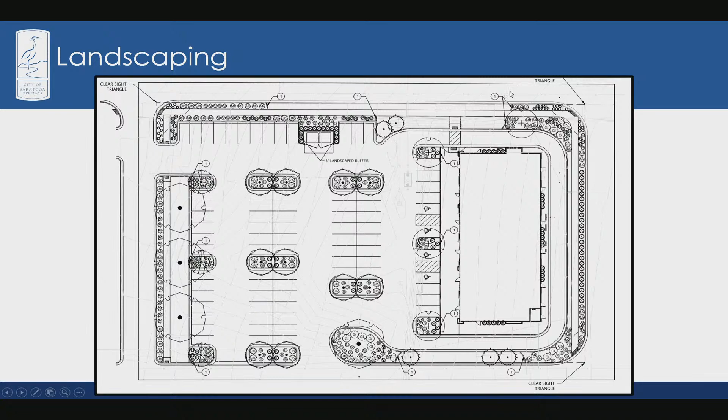Okay, so you know where the drive-through is? So that clear sight triangle that's past the corners of the drive-through, you're saying that there is cross-traffic there? Right. So there is traffic on the roads on the edges of this site.

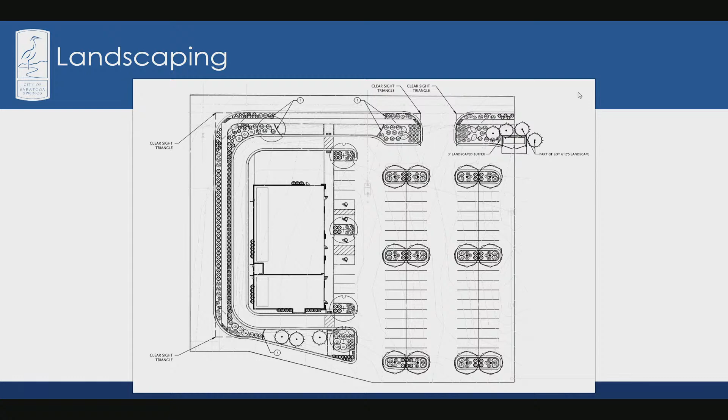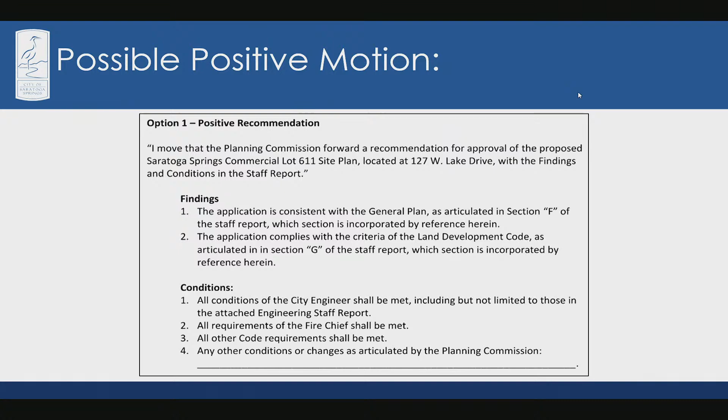Any question on the motion? All in favor, say aye. Aye. Any opposed, say nay. Great, that passes. All right, item number 3, Saratoga Springs Commercial Lot 610, site plan located at 1321 North Redwood Road.

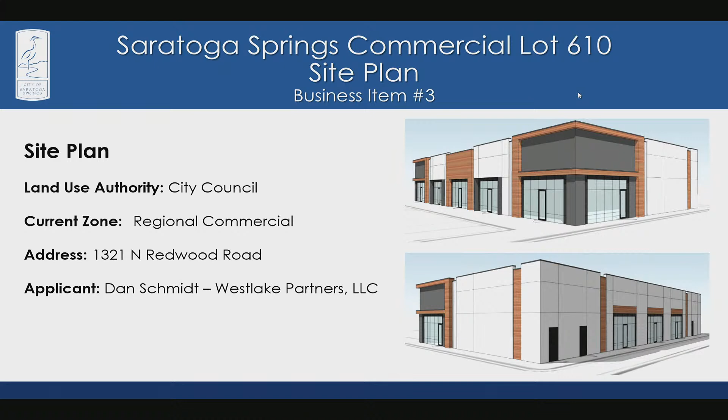Dan Schmidt, Westlake Partners LLC as applicant. This is same thing, different site, essentially. The buildings actually are different. So the address is along Redwood Road.

The access will be off of Lake Drive. It is 1.3 acres and meets all the parking requirements. Again, there is a drive-through option on this, and you can see the stacking on this one. So it does provide adequate parking and stackable sites, and it meets all of the landscaping requirements.

They have put a lot of effort into connectivity for pedestrians, with a connection to the Wendy's site to the north. There was an existing one, so they have made that connection.

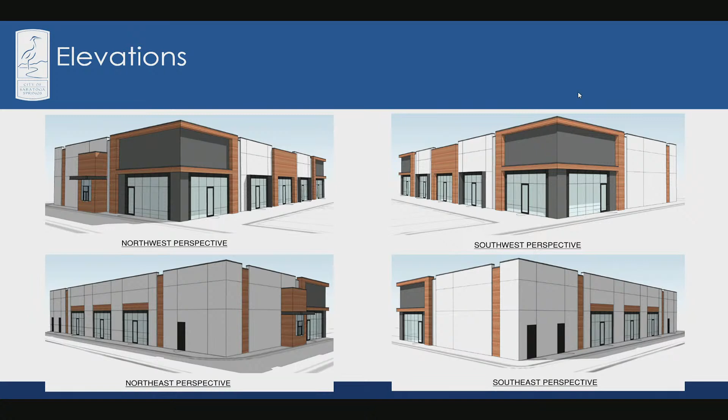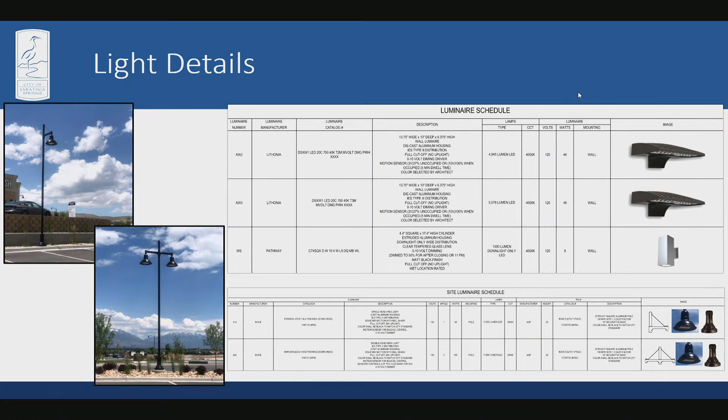And then the elevations, they have changed it up a little bit, like Commissioner Cunningham had stated. There are different aspects of this in the architectural designs. Lighting is exactly the same as the previous two sites. There is the shut-off connections, as Sam had mentioned before. And with that, staff recommends approval.

Okay, would the applicant like to add anything to the presentation? No. Okay. All right, I'll turn this over to the commission for questions and comments.

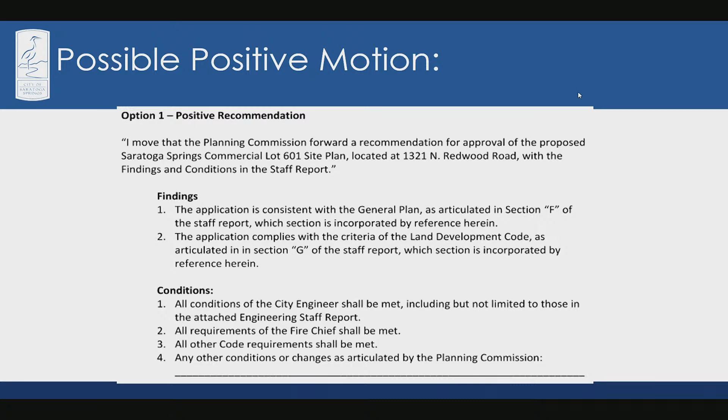Commissioner Wilden: Could you explain the flow of traffic? I know it's on Redwood Road, but I was struggling to figure out how people will access it. If you look at Plat F, you can see Lake Drive starts at Exchange, comes down and curves in front of this site, and then will go out to Redwood Road at a traffic light eventually.

There is also Shoreline Drive, and again, the access off of Redwood Road. Thank you very much. That's it.

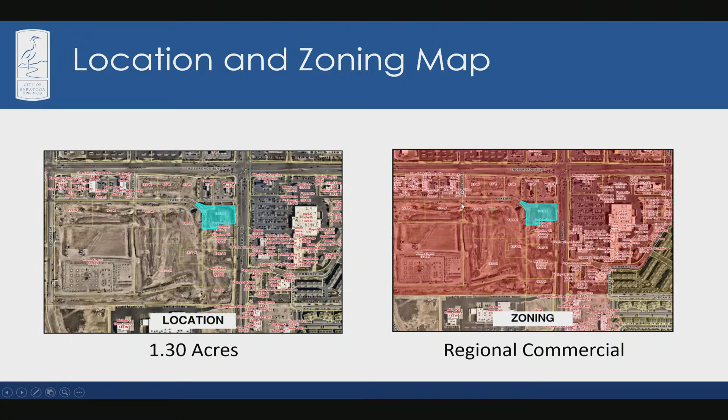Thank you, Commissioner Wilden. Commissioner Kilgore: Same question. Does the applicant agree to comply with the conditions in the staff packet? Yes. All right, thank you.

And then I did have one - I just want to know, just curious, what tenants you're possibly expecting, if you know already. Yeah, this one's a mix, I think it's mostly food. I don't actually recall all the tenants on this building. We do have the drive-through spoken for already. That seems to be the first ones going these days. And there may actually be one space vacant, but I think the other three filled.

I'm not recalling who the tenants are exactly, but I think there's a grill, there's a dessert place. Those are the ones I can remember. Okay, so sounds like mostly eating establishments. Mostly. Yeah, okay. All right, thank you. That's it for me. Thank you, Commissioner Kilgore.

Any other questions or comments from the commission? I will entertain a motion. I'll make a motion. I move that the Planning Commission forward a recommendation for approval of the proposed Saratoga Springs Commercial Lot 601 site plan located at 1321 North Redwood Road with the findings and conditions in the staff report.

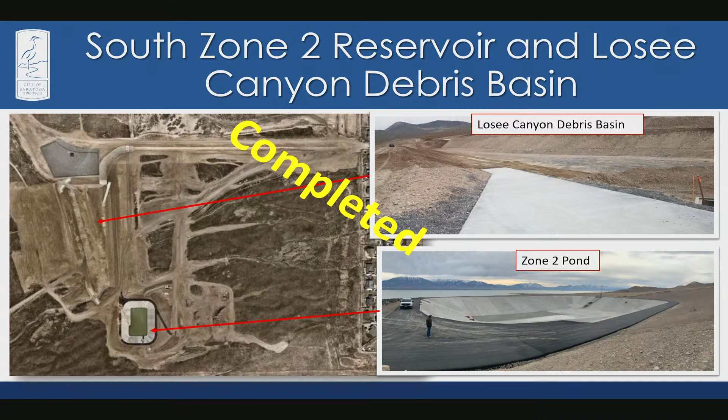The fire station trail is great because it gives two-way connections. All the residents that want to go north and use the great trails on the Mountain View corridor can do so—if you've noticed, Mountain View corridor has these great sidewalks that wrap the entire length. This allows people from Sunrise Meadows and Taos and all those places.

But also conversely, particularly with the new bike park that we built right there by the North Fire Station—that was so old I didn't even put it in the presentation—so west of Sunrise Meadows, just east and south of the fire station, there is a brand new bike park that we opened up, I think, early this spring.

It's got a little pump track you can do, like BMX with little ramps, and then there's 3 or 4 downhill tracks. So you can bike to the top of the hill, and then there's 3 or 4 challenging tracks. It's very popular.

So what's great about this is if you're coming from Harvest Hills or Aspen Hills, it gives you a continuous pathway now to get to that bike park. And then ultimately, that bike park sits along the canal trail.

That canal trail is built through Taos Ridge and sections, so that would be kind of a destination. This also gets you up to that canal trail, and when those areas are all built out, that canal trail would extend the full length of the city. If you've been in Harvest Hills, they have really nice sections of that.

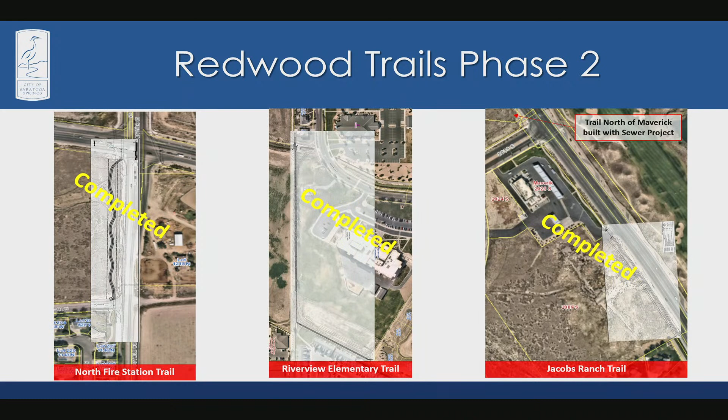The gravity sewer—as you may be aware, right now we are dealing with some sewer capacity issues. We're not allowing new plats to record in some of the south sections of the city unless they were to do these capacity improvements. So this is one piece of the puzzle.

The developers still need to come through and finish that with a new lift station to complete the capacity. But what it comes down to is the old original sewer line that runs through the golf course through Old SSD—it's old, it was undersized, because back then they never anticipated we would have the growth we have now. It needs to be upsized.

We realized it would cost tens of millions of dollars to rip out, and that sewer line actually runs through people's backyards all through Old SSD. So the solution was to bypass all that with a new lift station that will be built somewhere near the golf course clubhouse. This is the gravity line that the lift station will pump into.

So we've built the connecting point, and it takes some of the sewage off the lift station, but the developers still have to come build the lift station and pump all that sewage up to this gravity line by Ring Road by the fire station. That would allow the sewer capacity to grow.

This was kind of a big deal insofar as it was the last thing the city was doing, because the council bonded, I think, for about $14 million 5 or 6 years ago to help get that done. And they said, great, we've done our part, developers need to pitch in and do the rest. And that was the lift station.

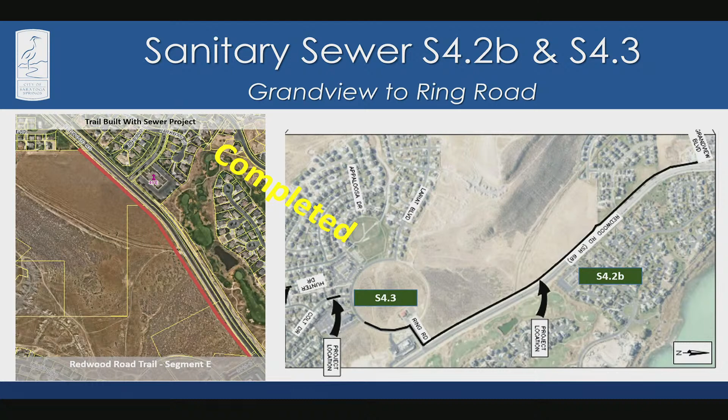Foothill Boulevard, a $20 million project, probably the biggest project the city has funded out of its own funds. This is hopefully going to open soon after Labor Day. It's pretty much done—they're just working on the final punch list, as they say, the last little repairs and things. We're excited, so hopefully soon after Labor Day, either the week of or the week after, we will be able to open this road.

It extends all the way from Pony Express Parkway past Grandview down to Lariat. So that gives a second route.

Anyone dealt with congestion on Redwood, this is sorely needed. This would allow you to not only get straight to Pony, but you can keep going up Foothill, which the council approved renaming to Mountain View Corridor. Soon our streets department will be removing all the street signs, so there will be no more Foothill in the city. It will now all be Mountain View Corridor, and you'll be able to go straight through all the way up. Hopefully that relieves some congestion on Redwood, though it will probably increase congestion a little on the road formerly known as Foothill.

Then this is the structure of the bridge. Another cool thing is we know in the future Tickville Wash is to be a green corridor, a trail corridor, so we included a pedestrian facility where this crosses Tickville. It doesn't currently connect east-west to anything, but in the future, when those church lands develop, this will allow pedestrian trails running parallel to Tickville to go down and cross under the road so pedestrians don't have to interact with traffic. It'll be a nice facility once that all gets developed.

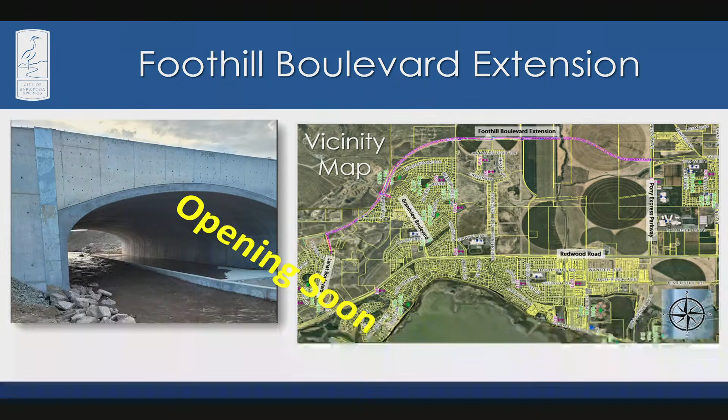You may have noticed this is under construction now. If you've driven across the street from Costco, we obtained some funding for finishing these little missing segments. This one connects from Dalmore Meadows to the new commercial development with that Smoked Taco and other new restaurants. There's another little segment north of there, shown in the thick red lines, connecting to the existing development off of Commerce - I think that's the dental office and stuff right there.

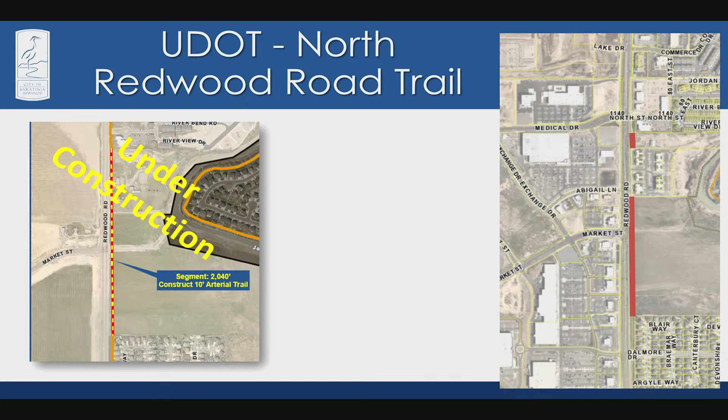So when this is built, residents and kids of Dalmore will be able to walk all the way up to basically City Hall on the trail. There are also a few pedestrian crossings at Market Street - you could walk up to the signal, cross it, and get into that pedestrian access. So this is nice to have too. We just got tired of waiting for developers to finish these segments, and it was grant money, so that's great too.

Instead of funneling 100% of cars up to 2300 Pioneer, they'll have options - they might continue easterly down that road to 1700 South and other roads, distributing traffic more evenly. Ultimately, the long-term vision is to have this road go all the way to I-15. UDOT has looked at this, they call it the Vineyard Connector, and American Fork and Lehi are looking at this road too. Long-term, we're looking at a 5-lane road going all the way from Redwood Road to I-15, so Pony Express would be a 5-lane road. We did 5 lanes from Redwood to the first roundabout, then it tapers down to 2 lanes - we need more money to go 5 lanes, including replacing the bridge over the river with a bigger one, to go 5 lanes all the way through North Shore.

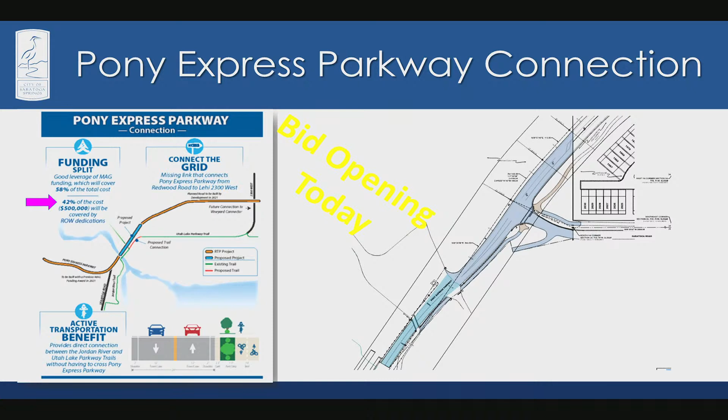TSSD, not our project, but I wanted to touch base on this briefly. This is the sewer district that services all the cities in this region for sewage and treatment. They're putting in a new trunk line from 2300 all the way to their treatment plant in American Fork or Orem, on the northeast corner of the lake there. You can see right now they have the closure in red on the left.

That's the current closure we've been dealing with. That should extend, I've heard, until the end of September, and then they'll move on to other closures. The main thing is these rolling closures are going to go on through the end of 2024.

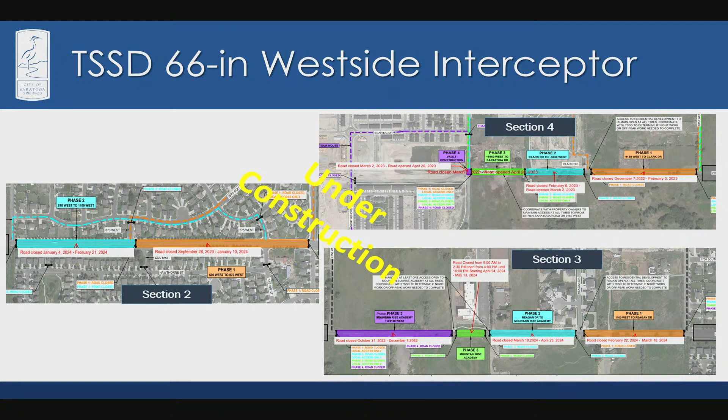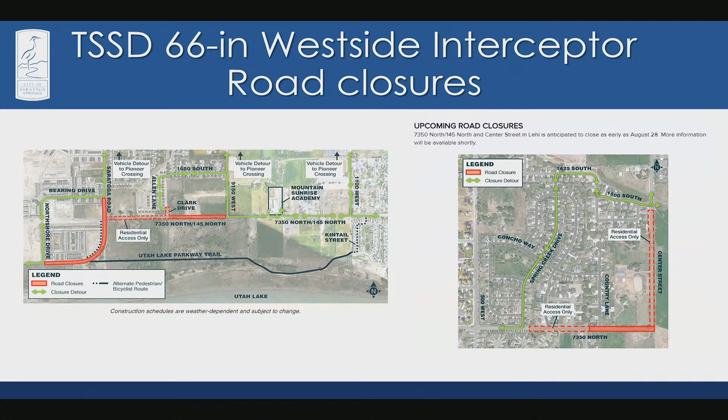There's a big project - just because this closure is done, there's going to continue to be closures on 145 North or 1900 South or whatever city address. In Lehi it's 1900 South. That's going to be ongoing, unfortunately, through 2024. Particularly if you have students at Mountain Sunrise Academy or any of the other schools, it's been frustrating, I'm sure.

This is a UDOT project, so we're going to have several UDOT projects here. Mountain View Corridor, we were just talking about it earlier - UDOT is actually out to bid right now on a design builder to build Mountain View Corridor all the way up to Porter Rockwell, basically paralleling it.

They hire the contractor, and the contractor begins construction while completing the design simultaneously. That allows them, in theory, to fast track the construction, because on a project of this scale, the grading could be 6 months or a year of just simply moving earth before they can even begin building structure. So they'll begin construction immediately while they also simultaneously finish designs.

The other thing you may notice here is on the aerial on the left, you'll see a little light blue kind of an upside-down J there, if you can see that. That's a pedestrian bridge. We fought with them pretty hard, and they put that in so that this canal - we were talking about those really great canal trails that run through Harvest Hills - this would allow people on that trail to actually cross the road at a grade-separated, safer crossing without having to go down to Redwood or go around.

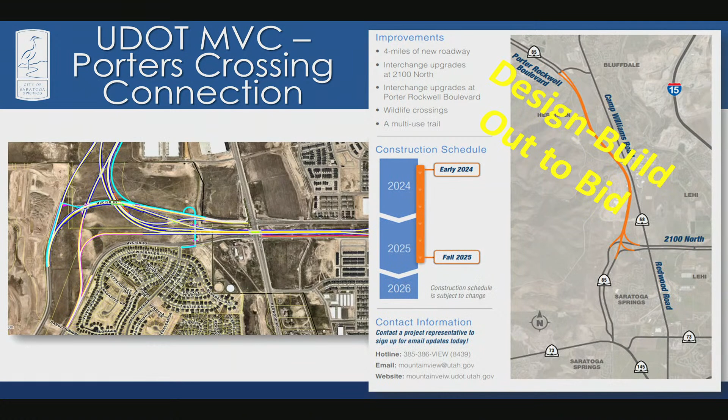That's a lot of earthwork, if you can imagine getting through the area by Camp Williams. That's a lot of dirt they're going to have to move.

The South Marina—so we get into some of the fun projects here. If you've been to the South Marina, you may have noticed in the last year we built a new jetty. You can see in this aerial image this new jetty to the north, the third jetty on the north side. The intent there was to create an area specifically for non-motorized use—stand-up paddleboarding, kayaking, swimming.

So we did the jetty. We did quite a bit of dredging, but I'll admit we probably have a lot more dredging to do. There's a lot of lake, and it's very expensive, but we got enough dredged that at least there's a deep area within the first 100 feet of shore. We're out to bid right now, and next week's the bid opening.

That would be the rest of it—that'll be all the landscaping for the entire property. It'll be an expansion of the parking lot, new restrooms, and a new rental pavilion so that a vendor could in theory rent out paddleboards, kayaks, toys, whatever.

Is the boat launch—is that ramp going to be? You don't love the boat ramp? No, I do love it. I love to sit there and watch people burn out their tires trying to get up.

This project does not include anything addressing the boat ramp, but we are well aware that what happens, particularly in low water, is right at the end of that concrete it gets a big hole, and people don't realize that, and they put their tires off the end of that concrete ramp and it just disappears. We've backfilled it with rock many times, and it's an ongoing issue.

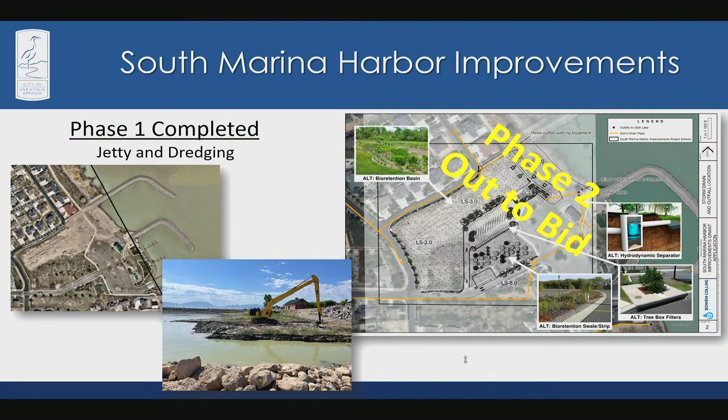The North Marina, the boardwalk with food shops. So back to North Shore. When we approved the North Shore development, the developer gave us 20 acres of this prime property, which used to be, I believe, the site of the original 1960 Saratoga Marina, when people would come here and stuff. It's been long since abandoned.

But we acquired the property through that development agreement, and we've just spent the last 4 months dredging it. As you can see in the pictures, it was very messy. We're working now on the design. So you can see in that picture, we have grand visions for this, potentially even fancier and nicer than the South Marina.

That probably is a $40 million facility. We've secured about $3 million in funding for dredging, and we hope in the near future to at least be able to build the jetty. You can see this new jetty on the left edge there of the colored picture, a parking lot and a boat launch. That alone probably requires about $5 million.

So again, it won't be open to the public in the near future. We need a lot more funding and a lot more improvements before we open it. It could be possible in the next 12 or so months, depending on funding. There's a lot of things going on here.

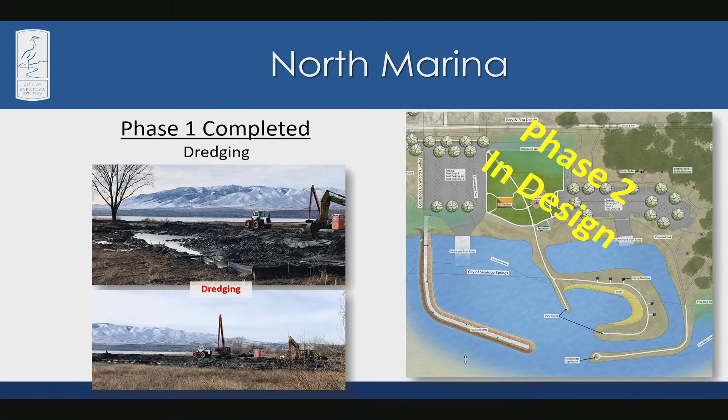Redwood Road Underpass. This is in design, and currently the goal is to have it open in time, a year from now, so fall of 24. That's dependent on successful right-of-way acquisition. They're pretty much done with design and trying to finalize right-of-way acquisition, and as soon as that's done, they could go out to bid.

This would allow residents of Lake Mountain Estates to walk to the new Harbor Point Elementary without having to cross the road at Harbor Parkway, which is probably not a safe place. There's no signal there or anything safe. I think they're getting bused right now; I can't imagine they have to walk. So we're going to save the school district a lot of money in busing by this project. They've been very cooperative, working with us to get us property for there.

What's nice about this is the east side of this underpass is at grade. So even though you have to go down on the west side, kind of dug down, it'll be open on the east side, so it'll be safer and more inviting, not totally an underground facility. It's simply on the west side where it's built up, but on the east side it should be right at grade. So if you're standing on Captains Street, you should be able to see right up the center of that underpass.

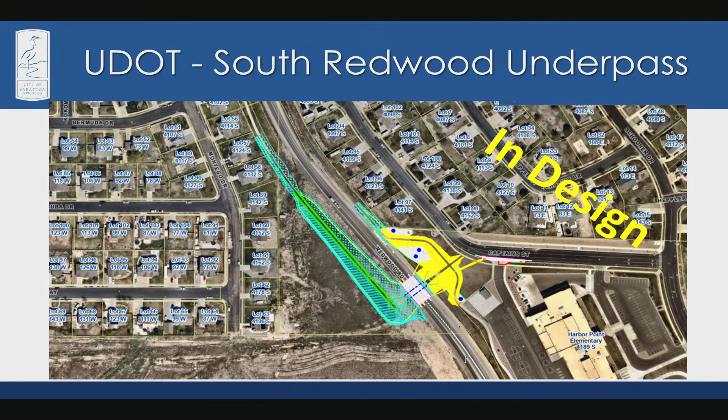Signal at Redwood Road and Aspen Hills Boulevard. This is probably going to be constructed in the next few months. They're just finishing designs on it right now, and I'd expect UDOT would be under construction soon. It's a busy intersection, and UDOT is funding this project. It'll add some dedicated right turn pockets and such.

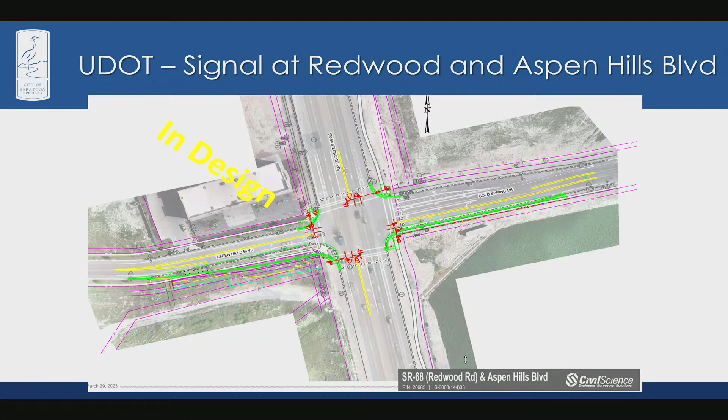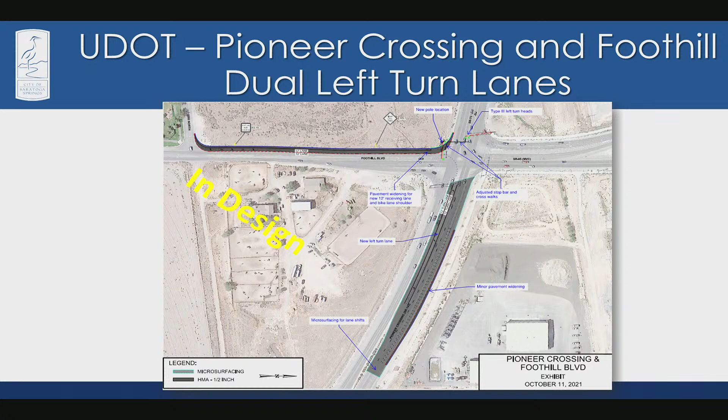This is a frustrating project if you live in SSD, and for staff too. We got this project funded 2 or 3 years ago. We actually had a contractor begin construction, and they walked off the job and left a mess. If you've heard of this, you know; if not, you're lucky you didn't have to deal with it. We had a contractor make a mess, try to make a bunch of claims and get more money, and we ended up having to fire them. We had to redo the job, go get more funding, and we're back in redesign, hoping we can do this successfully this time.

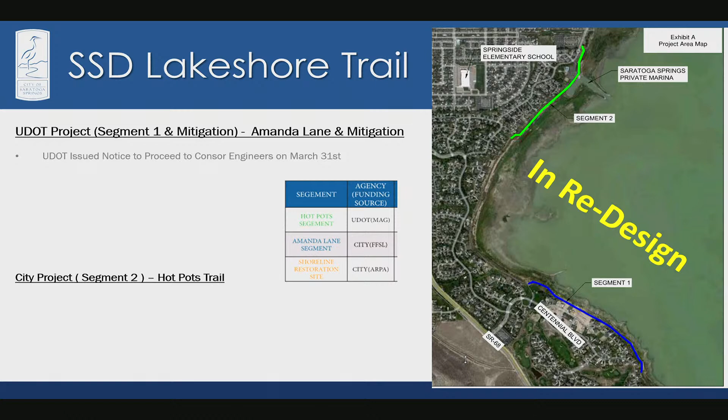They also include shoreline mitigation. They get rid of some of the old canal in sections where homeowners don't love this old canal that collects stagnant water between the trail and the back of their home. So, I'm not going to jinx it, but second time's the charm, right?

The city council is anxious to get this up and running because we have a lot of residents who would love to have a local cemetery. But we're kind of stuck waiting for the developer to bring infrastructure in - bodies in the backyard. This is on the west end of the project, so there's a lot of infrastructure needed to get service up there. As much as the council would like this to happen today, the infrastructure just isn't there to support it quite yet, but hopefully in a year or two. As soon as the developer has infrastructure, the council wants this open ASAP.

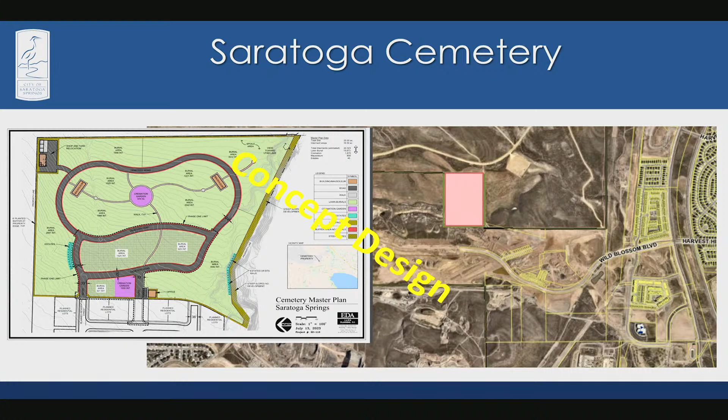So again, not only do we have to finish figuring out what the city hall property looks like, but we'd also have to find funding, because currently we've pretty much tapped through most of our cash funding. So you either have to wait to collect more impact fees or you'd have to bond or something. Just concepts, but still fun to look at.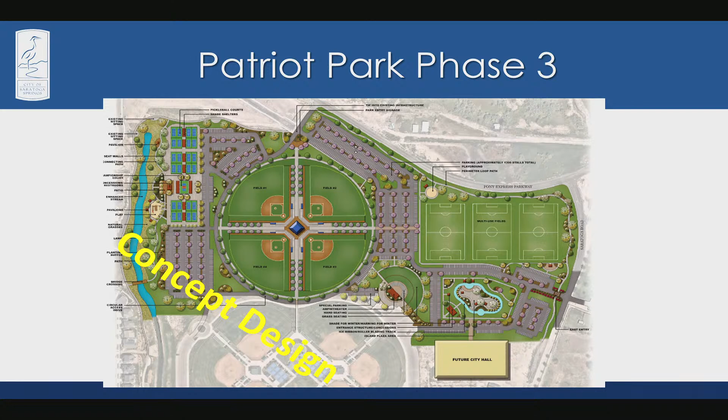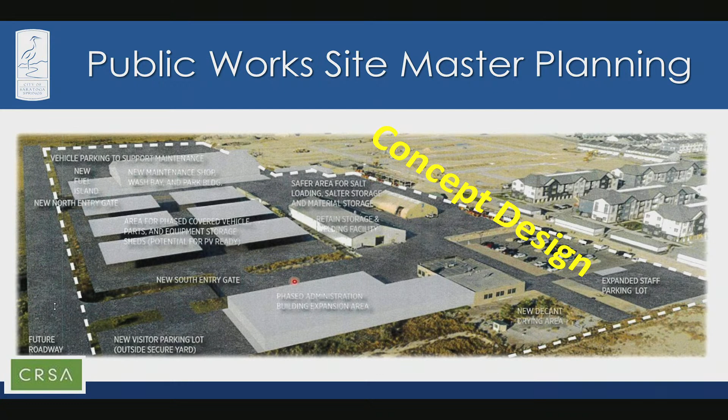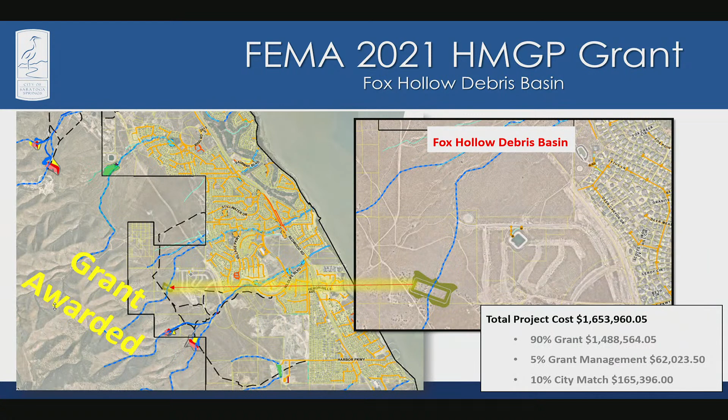I think that was it. Sorry, that took probably more time than I anticipated. Thank you for that.

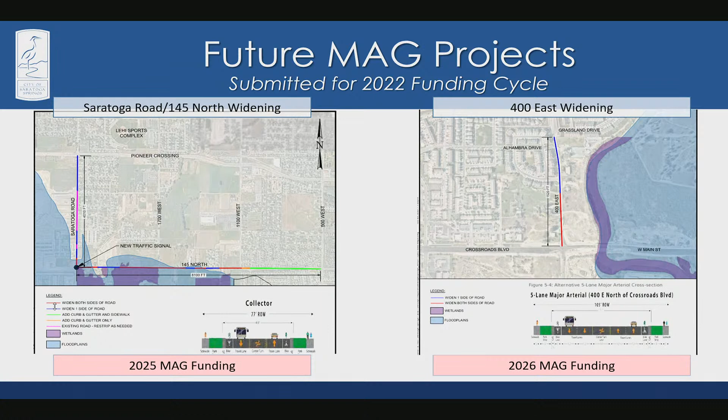What's the estimated completion date for the lift station? For the south, there's no estimated completion date. We're working right now to acquire the property, which has been ongoing for a while. The seller doesn't really want to sell, but I think we've finally turned a corner and are close to getting a deal done. Then the developers have to come in and design and build it. We met with them yesterday, and they've told us they have the money lined up and the designer lined up, so as soon as we close on the property, they intend to move forward quickly. I hate to put a date out there, but even if they could move forward full steam, with facilities these days and logistics and electrical components, I'd be surprised if it was less than a year. So best case scenario, I'd think at least a year, if not a bit longer, since this lift station is holding up construction for the south end — we're looking at probably another year.

Yes, okay. I also had a question about whether the projects are following, to any degree, the master plan's prioritization of projects that was recommended for road projects and things like that — is it kind of following that? Yeah, we have impact fee facility plans. We collect impact fees from developers and we have those lists, so generally we're following those lists. When it comes to roads and storm drain, sometimes those lists differ — for drinking water and irrigation there's only about 10 or 15 projects on the lists and we're pretty much exactly following those. But for storm drain and transportation, those lists are like 50 projects long.